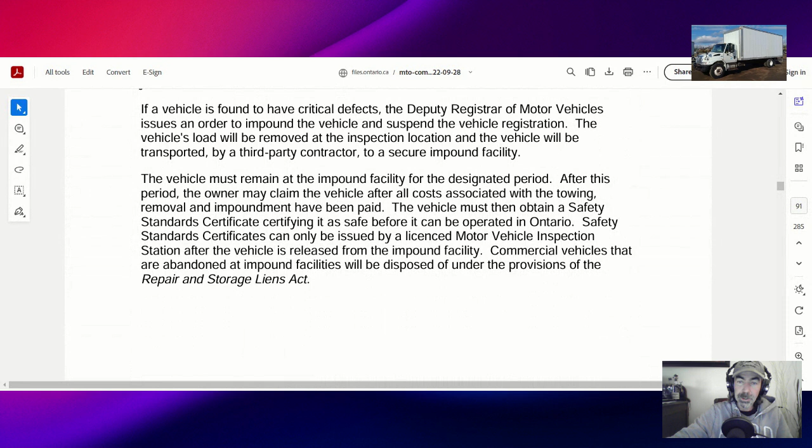The vehicle must remain at the impound facility for the designated period. After this period, the owner may claim the vehicle after all costs associated with the towing, removal, and impoundment have been paid.

The vehicle must then obtain a safety standards certificate certifying it as safe before it can be operated in Ontario. Safety standards certificates can only be issued by a licensed motor vehicle inspection station after the vehicle is released from the impound facility.

Commercial vehicles that are abandoned at impound facilities will be disposed of under the provisions of the Repair and Storage Liens Act.

Vehicles that can be impounded: any commercial motor vehicle operated by a Commercial Vehicle Operators Registration (CVOR) or National Safety Code (NSC) holder, or one that would require CVOR or NSC registration and has a gross weight or registered gross weight exceeding 4,500 kilograms, may be subject to impound if operated with critical defects. This includes buses, trucks, and trailers drawn by these vehicles, as well as all tow trucks regardless of weight. Exemptions: ambulances, fire vehicles, hearses, casket wagons, and motorhomes are not affected by this legislation.

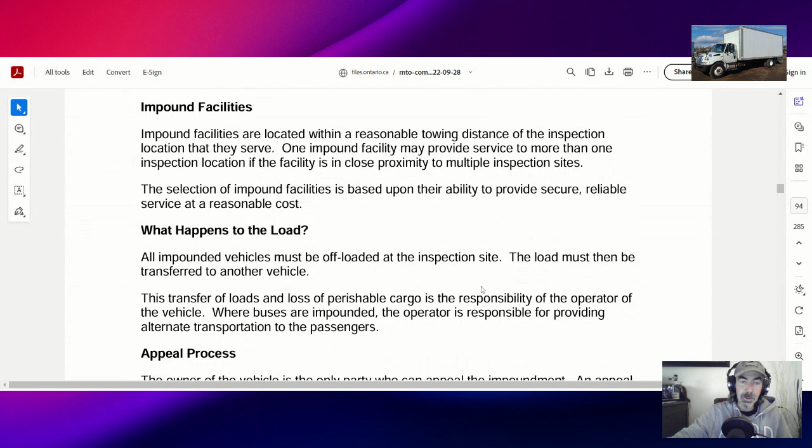Impound facilities are located within a reasonable towing distance of the inspection location they serve. One impound facility may provide service to more than one inspection location if it is in close proximity to multiple inspection sites. The selection of impound facilities is based upon their ability to provide secure, reliable service at a reasonable cost.

What happens to the load? All impounded vehicles must be offloaded at the inspection site, and the load must then be transferred to another vehicle. This transfer of loads and loss of perishable cargo is the responsibility of the operator of the vehicle.

Where buses are impounded, the operator is responsible for providing alternate transportation to the passengers.

Appeal process: the owner of the vehicle is the only party who can appeal the impoundment. An appeal may be made to the License Appeal Tribunal on one of two grounds: one, if the vehicle was stolen; two, if the critical defect was not present at the time of daily inspection.

During the appeal, the owner may apply to the Superior Court of Justice to have the vehicle released from the impound facility after all fees and towing charges have been paid and security has been posted. The Superior Court of Justice will set security of between $5,000 and $10,000.

If the appeal process is successful, the owner will be reimbursed by the Crown for the cost of towing and impound fees. If the order to impound and suspend is not overturned, the owner must return the vehicle to the impound facility for the remainder of the period or forfeit the posted security.

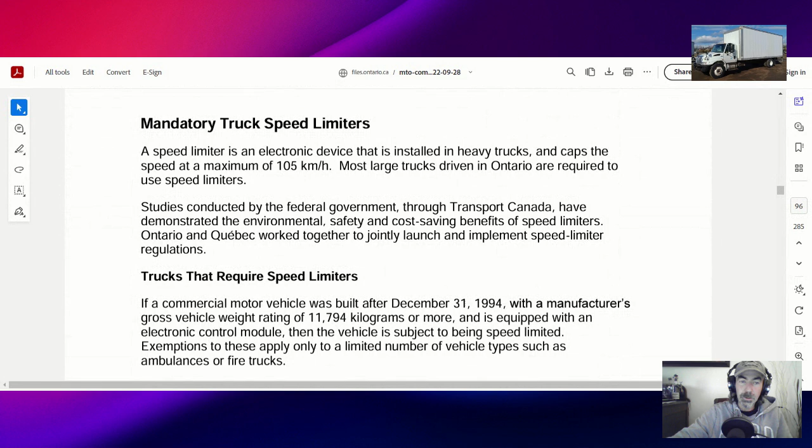Mandatory truck speed limiters. A speed limiter is an electronic device that is installed in heavy trucks and caps the speed at a maximum of 105 kilometers per hour. Most large trucks driven in Ontario are required to use speed limiters.

Studies conducted by the federal government through Transport Canada have demonstrated the environmental, safety, and cost saving benefits of speed limiters. Ontario and Quebec worked together to jointly launch and implement speed limiter regulations.

Trucks that require speed limiters: if a commercial motor vehicle was built after December 31st, 1994, with a manufacturer's gross vehicle weight rating of 11,794 kilograms or more and is equipped with an electronic control module, then the vehicle is subject to being speed limited. Exemptions to these apply only to a limited number of vehicle types, such as ambulances or fire trucks.

Legislation. Ontario passed legislation and supporting regulations to mandate the use of speed limiters on commercial vehicles in 2008. Links to the legislation and regulations can be found below.

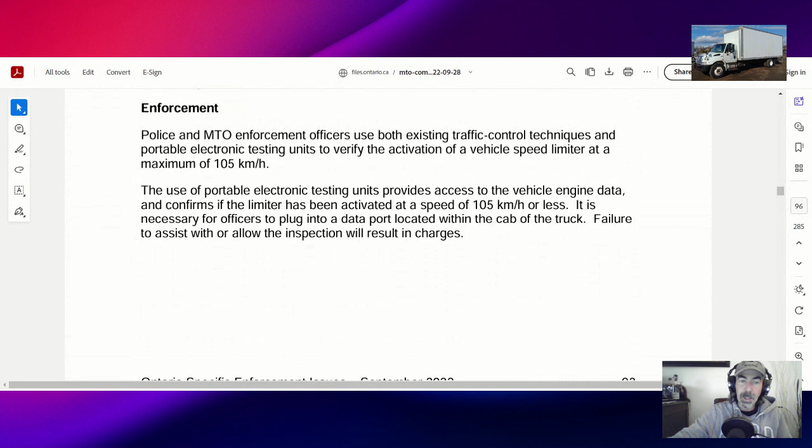Enforcement. Police and MTO enforcement officers use both existing traffic control techniques and portable electronic testing units to verify the activation of a speed limiter at a maximum of 105 kilometers per hour. The use of portable electronic testing units provides access to the vehicle engine data and confirms if the limiter has been activated at a speed of 105 kilometers per hour or less.

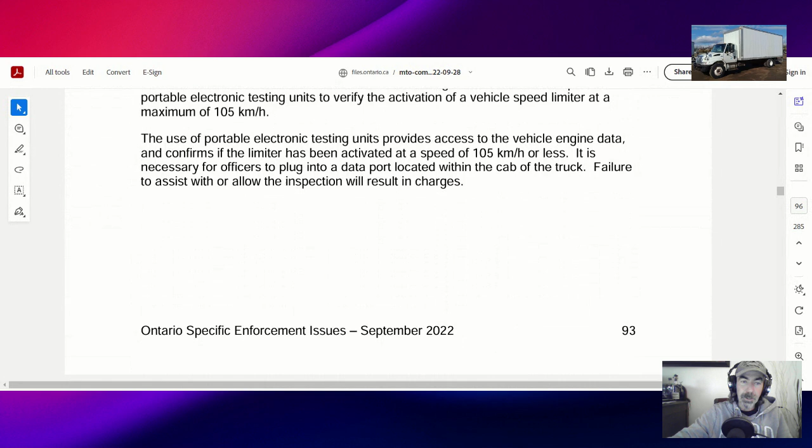It is necessary for officers to plug into a data port located within the cab of the truck. Failure to assist with or allow the inspection will result in charges.

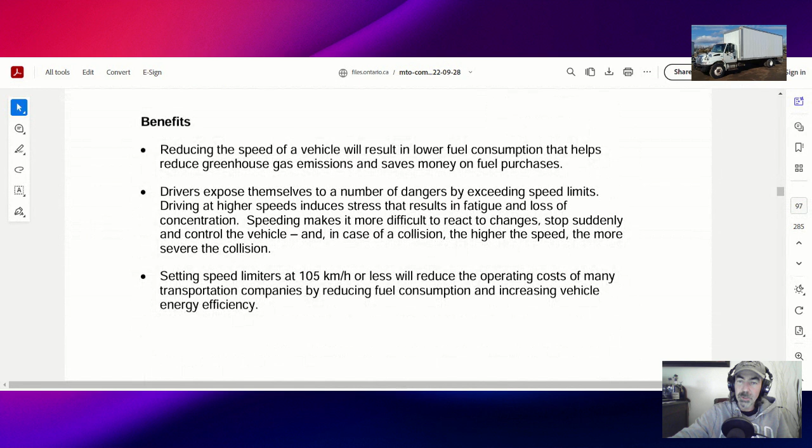Benefits. Reducing the speed of a vehicle will result in lower fuel consumption that helps reduce greenhouse gas emissions and saves money on fuel purchases.

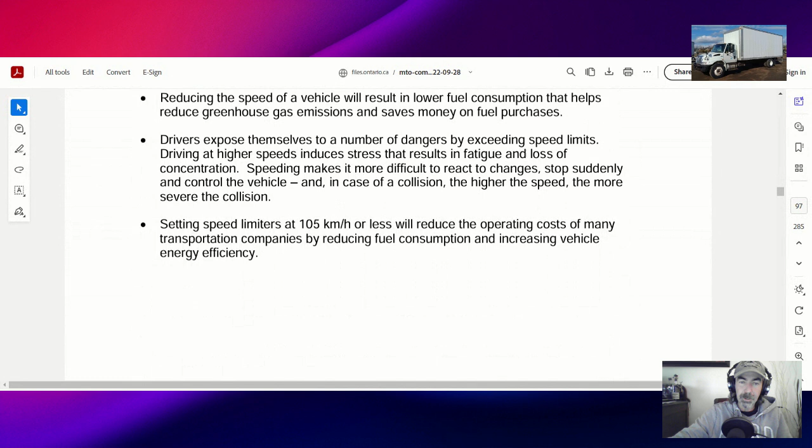Drivers expose themselves to a number of dangers by exceeding speed limits. Driving at higher speeds induces stress that results in fatigue and loss of concentration. Speeding makes it more difficult to react to changes, stop suddenly, and control the vehicle. And in case of a collision, the higher the speed, the more severe the collision.

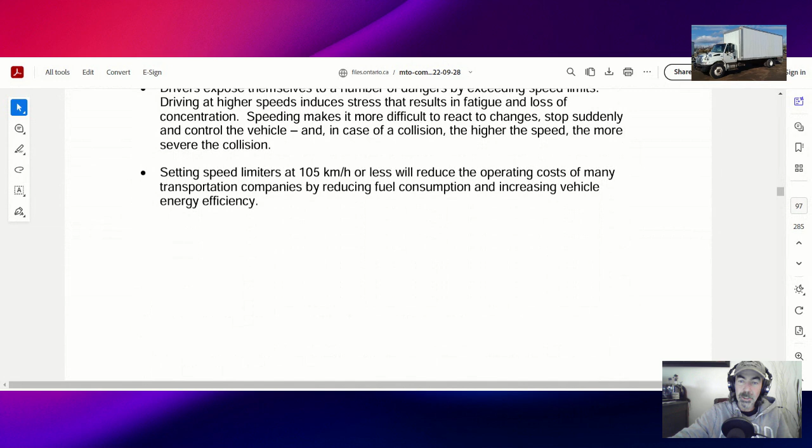Setting speed limiters at 105 kilometers per hour or less will reduce the operating costs of many transportation companies by reducing fuel consumption and increasing vehicle energy efficiency.

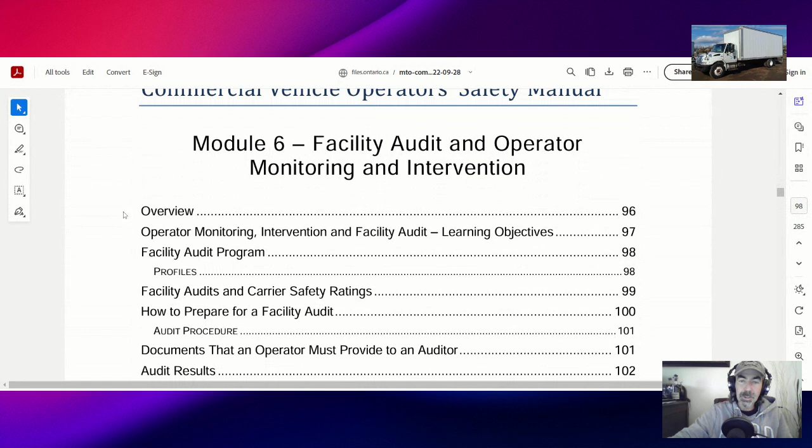Commercial Vehicle Operators Safety Manual, Module 6, Facility Audit and Operator Monitoring and Intervention. Overview.

Operator monitoring, intervention, and facility audit learning objectives; facility audit program profiles; facility audits and carrier safety ratings; how to prepare for a facility audit procedure; documents that an operator must provide to an auditor; audit results; conducting a self audit, a step by step process; vehicle maintenance profile; qualification, records and reporting, QR&R profile; hours of service profile; facility audit sample size guideline; intervention and consequences of non-compliance; monitoring, CVOR monitoring, progressive intervention appeals; Appendix A, sample calculation qualifications, records and reporting, and hours of service profiles.

Overview. The Commercial Safety and Compliance Branch of the Ministry of Transportation of Ontario has prepared this guide to assist and ensure that truck and bus companies, commercial vehicle operators, operate safely and are compliant with the regulations that govern highway use.

Ontario, other provinces, the Government of Canada, and the transportation industry developed the rules and regulations to help reduce the number and severity of collisions. Each jurisdiction has used the National Safety Code standards as guides in drafting their own transportation safety legislation. This approach promotes uniformity across Canada and helps to ensure that the transportation industry remains as viable and sustainable as possible.

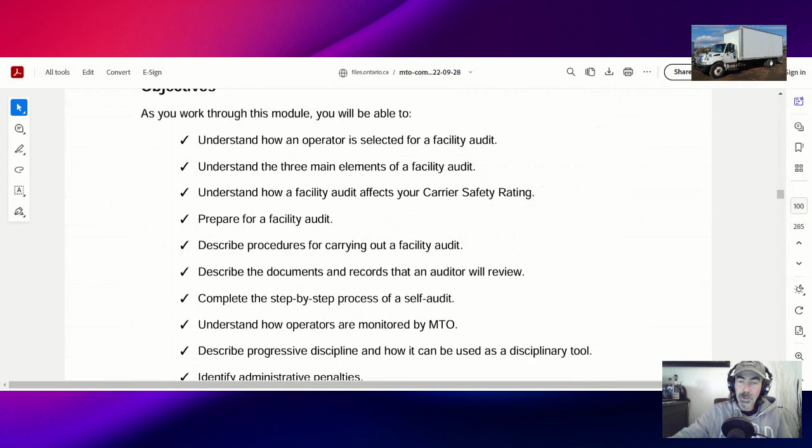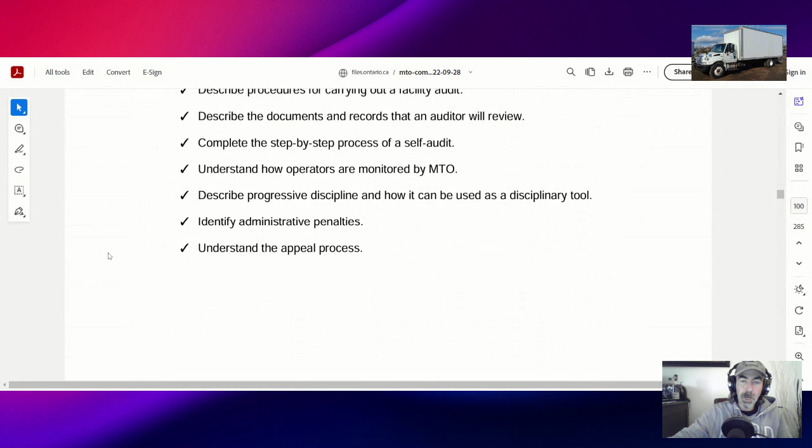Learning objectives: as you work through this module, you will be able to understand how an operator is selected for a facility audit, understand the three main elements of a facility audit, understand how a facility audit affects your carrier safety rating, prepare for a facility audit, describe procedures for carrying out a facility audit, describe the documents and records that an auditor will review, complete the step-by-step process of a self-audit, understand how operators are monitored by MTO, describe progressive discipline and how it can be used as a disciplinary tool, identify administrative penalties, and understand the appeal process.

Facility audit program. An operator can be subject to a facility audit at any time, and the Ministry of Transportation has the authority to audit an operator under the Highway Traffic Act.

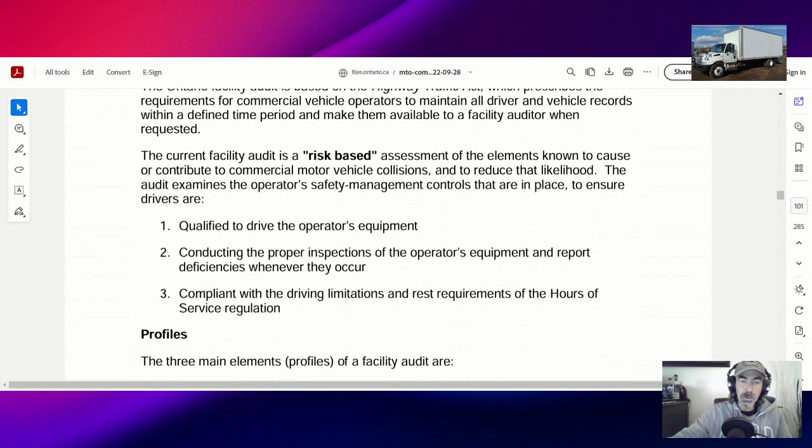The Ontario facility audit is based on the Highway Traffic Act, which prescribes the requirements for commercial vehicle operators to maintain all driver and vehicle records within a defined time period and make them available to a facility auditor when requested. The current facility audit is a risk-based assessment of the elements known to cause or contribute to commercial motor vehicle collisions, and to reduce that likelihood.

The audit examines the operator's safety management controls that are in place to ensure drivers are: one, qualified to drive the operator's equipment; two, conducting the proper inspections of the operator's equipment and reporting deficiencies whenever they occur; three, compliant with the driving limitations and rest requirements of the hours of service regulations.

There are three main elements, or profiles, of a facility audit. One, vehicle maintenance: records current for a period of 24 months, or 6 months after the vehicle ceases to be operated. Two, hours of service: records current for a period of 6 months. Three, driver qualification records and reporting: records current for a period of 2 years, or from the date the driver started with the operator if less, or 6 months after the driver ceases to be employed.

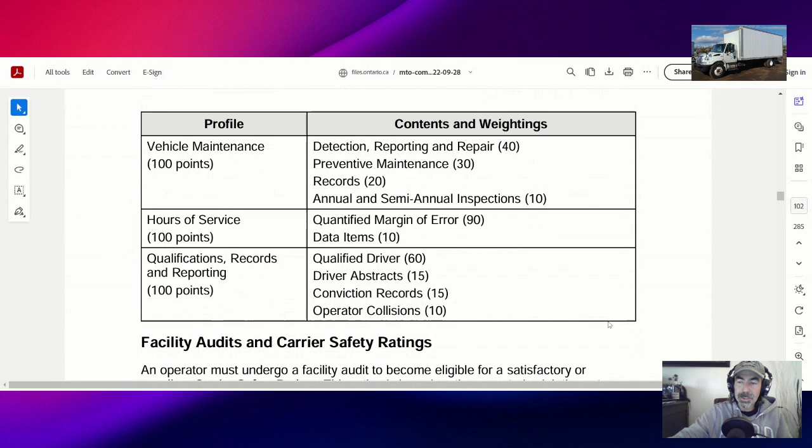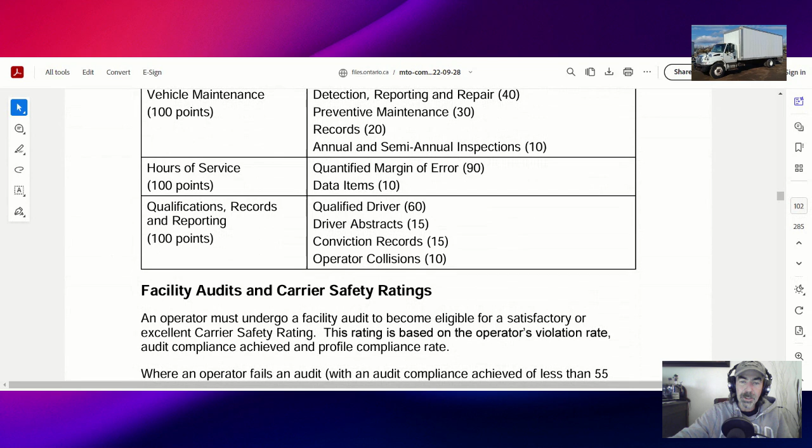Profile scoring: vehicle maintenance, 100 points; hours of service, 100 points; qualification records and reporting, 100 points. Contents and weighting: detection, reporting, and repair, 40; preventative maintenance, 30; records, 20; annual and semi-annual inspections, 10. Quantified margin of error, 90; data items, 10. Qualified driver, 60; driver abstracts, 15; conviction records, 15; operator collisions, 10.

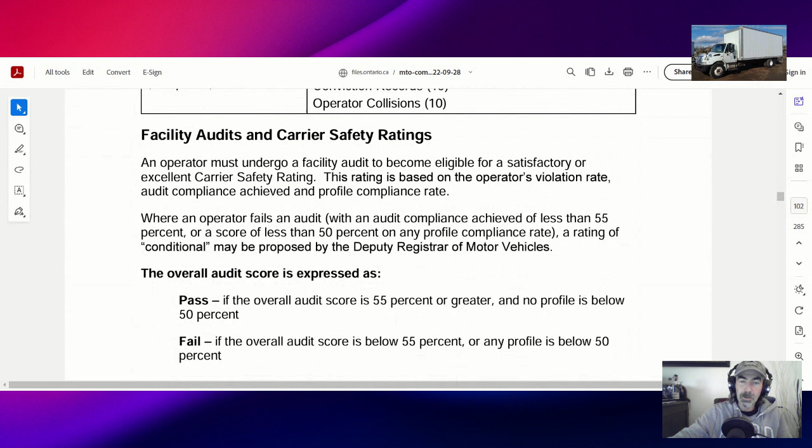Facility audits and carrier safety ratings. An operator must undergo a facility audit to become eligible for a satisfactory or excellent carrier safety rating. This rating is based on the operator's violation rate, audit compliance achieved, and profile compliance rate. Where an operator fails an audit with an audit compliance achieved of less than 55%, or a score of less than 50% on any profile compliance rate, a rating of conditional may be proposed by the Deputy Registrar of Motor Vehicles. The overall audit score is expressed as pass if the overall audit score is 55% or greater and no profile is below 50%; fail if the overall audit score is below 55% or any profile is below 50%.

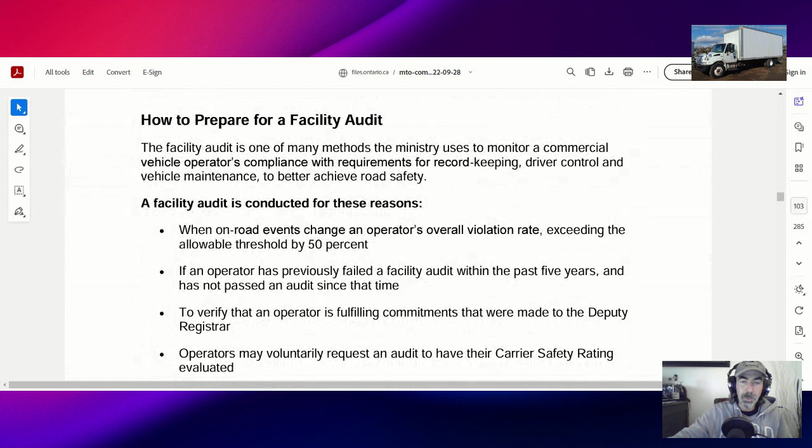How to prepare for a facility audit. The facility audit is one of many methods the ministry uses to monitor a commercial vehicle operator's compliance with the requirements for record keeping, driver control, and vehicle maintenance to better achieve road safety.

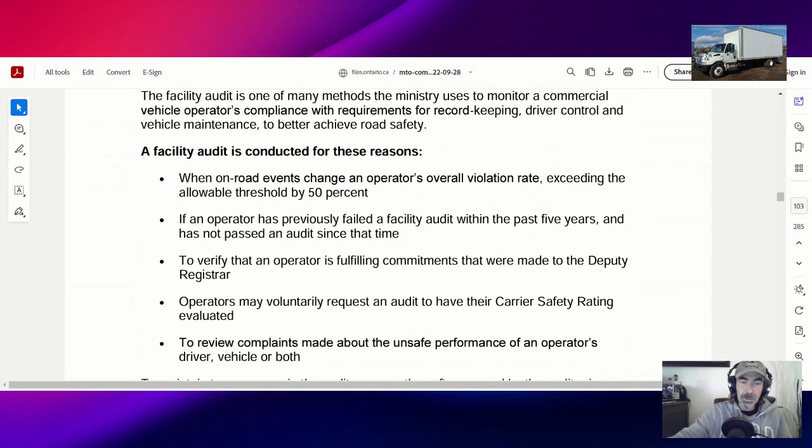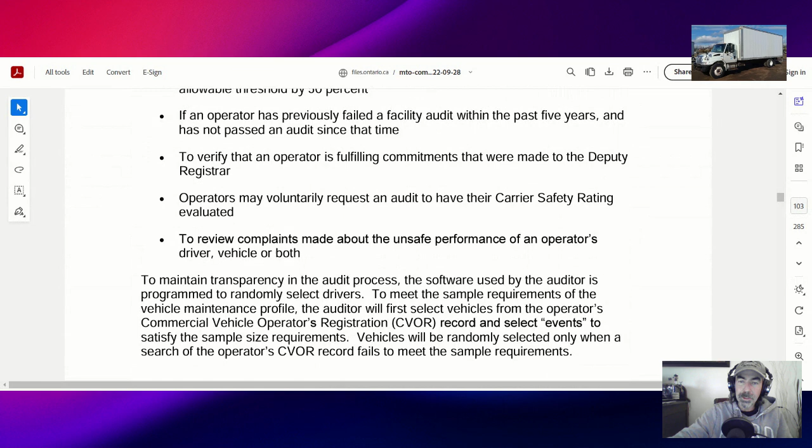A facility audit is conducted for these reasons: when on-road events change an operator's overall violation rate, exceeding the allowable threshold by 50%; if an operator has previously failed a facility audit within the past 5 years and has not passed an audit since that time; to verify that an operator is fulfilling commitments made to the deputy registrar; operators may voluntarily request an audit to have their carrier safety rating evaluated; or to review complaints made about the unsafe performance of an operator's driver, vehicle, or both.

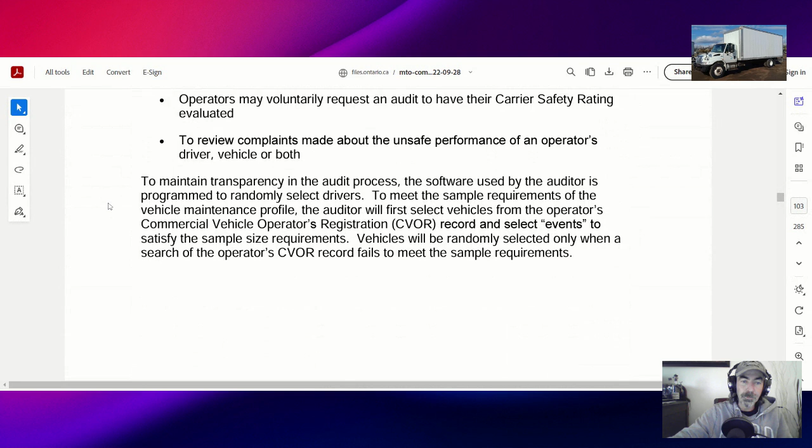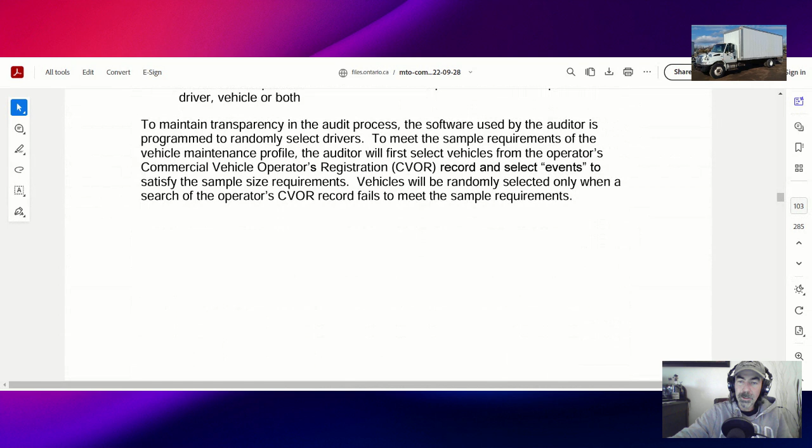To maintain transparency in the audit process, the software used by the auditor is programmed to randomly select drivers. To meet the sample requirements of the vehicle maintenance profile, the auditor will first select vehicles from the operator's Commercial Vehicle Operators Registration (CVOR) record and select events to satisfy the sample size requirements. Vehicles will be randomly selected only when a search of the operator's CVOR record fails to meet the sample requirements.

Audit procedure. A facility auditor may contact the operator to schedule an audit by phone or in writing. The purpose of the facility audit, as well as the documents that will be required, is clearly explained to the operator at that time. The auditor may also want to verify some details about the operator's business during the call.

At the entrance interview, the auditor explains the purpose, procedure, scoring, and importance of the audit and its potential impact on the operator's carrier safety rating and carrier profile.

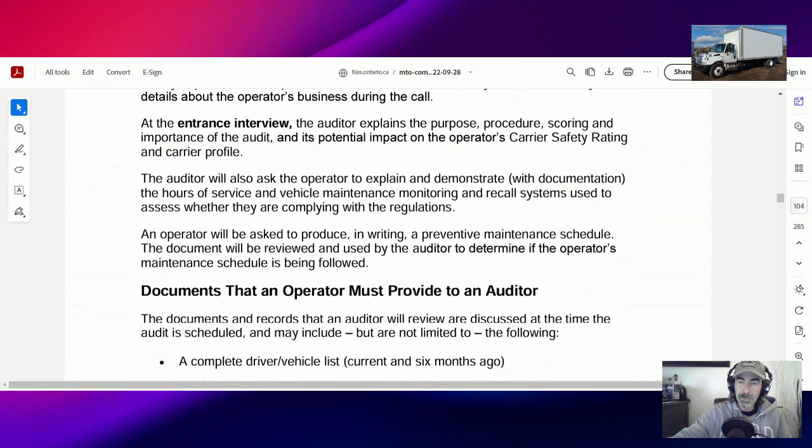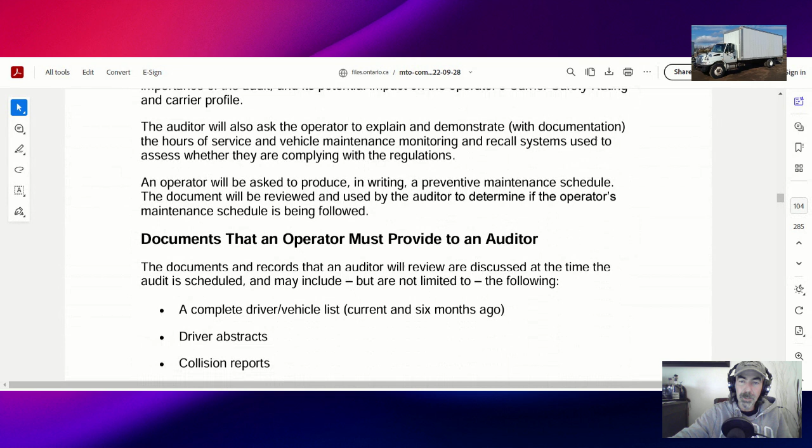The auditor will also ask the operator to explain and demonstrate with documentation the hours of service and vehicle maintenance monitoring and recall systems used to assess whether they are complying with the regulations.

An operator will be asked to produce in writing a preventative maintenance schedule. The document will be reviewed and used by the auditor to determine if the operator's maintenance schedule is being followed.

Documents that an operator must provide to an auditor. The documents and records that an auditor will review are discussed at the time the audit is scheduled and may include, but are not limited to, the following: a complete driver/vehicle list, current and 6 months ago, driver abstracts, collision reports, independent time markers from operator or MTO records, for example toll receipts, roadside inspection reports, conviction records, and so on.

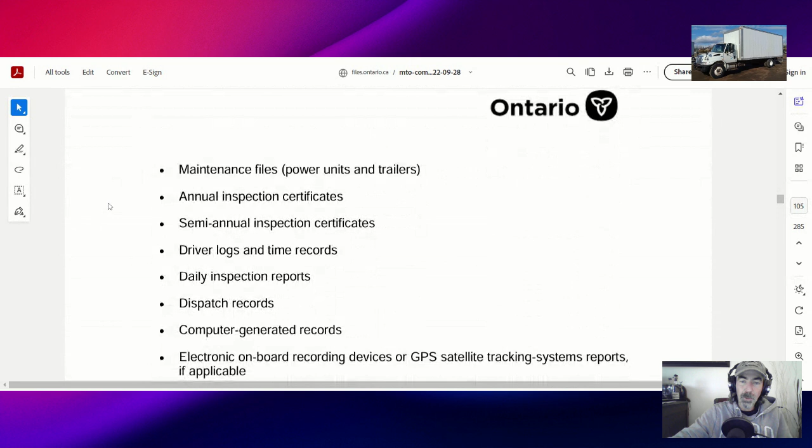Payroll records, invoices, cell phone, fuel, bridge authority, commercial accounts, and so on, bills of lading, operators' invoice records, bridge tolls, accommodation/fuel receipts, operators' maintenance statements, maintenance files, power units and trailers, annual inspection certificates, semi-annual inspection certificates, driver logs and time records, daily inspection reports, dispatch records, computer-generated records, electronic onboard recording devices or GPS satellite tracking system reports, if applicable, proof of insurance, or any supporting document that could be used to assess compliance.

The audit will be completed in a timely manner, but its length will vary depending on a number of factors, such as the size of the operation, the availability of records, and the availability of the auditor and the operator's support personnel.

Audit results. After the audit is completed, an exit interview takes place. The operator receives a summary of the audit with scores for each driver, vehicle, and, if applicable, collision files that were examined. The operator will be given ample opportunity to review and discuss with the auditor the results of the audit and any possible charges.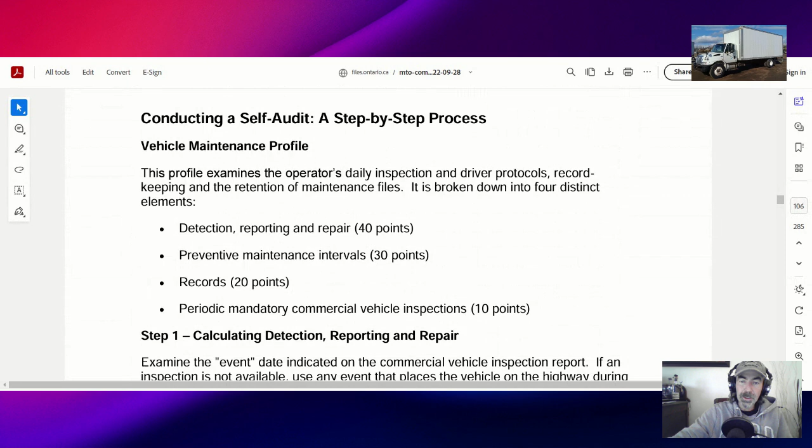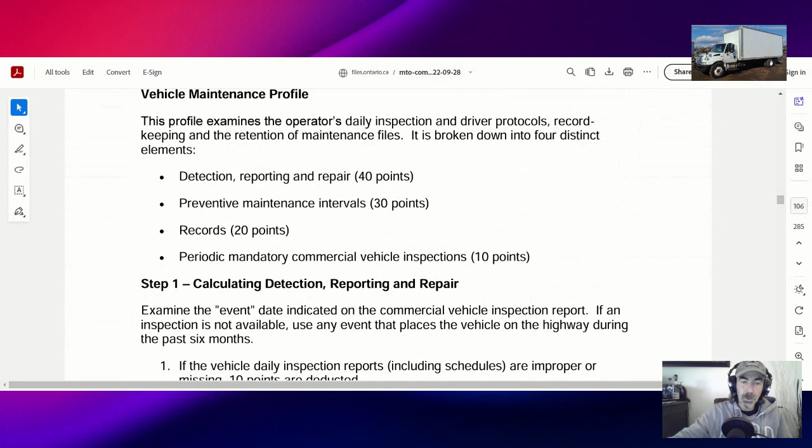Conducting a self-audit, a step-by-step process. Vehicle maintenance profile. This profile examines the operator's daily inspection and driver protocols, record keeping, and the retention of maintenance files. It is broken down into 4 distinct elements: detection, reporting, and repair, 40 points; preventative maintenance intervals, 30 points; records, 20 points; periodic mandatory commercial vehicle inspections, 10 points.

Step 1. Calculating detection, reporting, and repair. Examine the event date indicated on the commercial vehicle inspection report. If an inspection is not available, use any event that places the vehicle on the highway during the past 6 months.

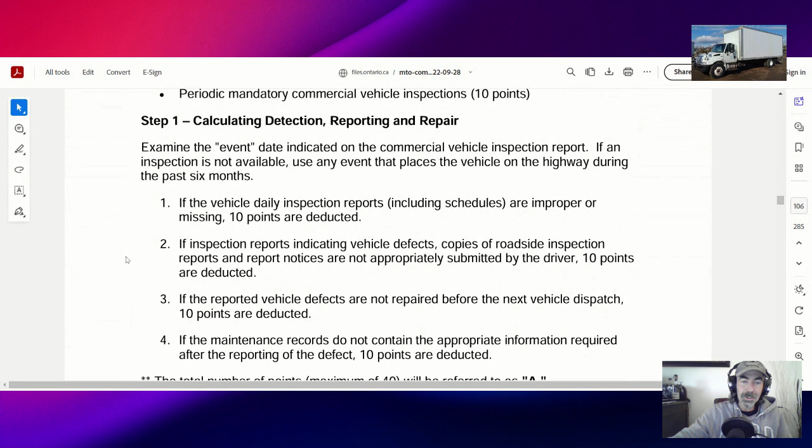1. If the vehicle daily inspection reports, including schedules, are improper or missing, 10 points are deducted. 2. If inspection reports indicating vehicle defects, copies of roadside inspection reports, and report notices are not appropriately submitted by the driver, 10 points are deducted.

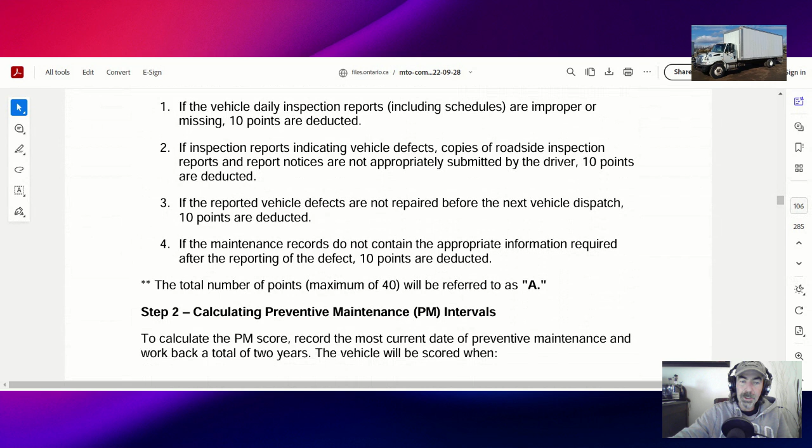3. If the reported vehicle defects are not repaired before the next vehicle dispatch, 10 points are deducted. If the maintenance records do not contain the appropriate information required after the reporting of the defect, 10 points are deducted. The total number of points, maximum 40, will be referred to as A.

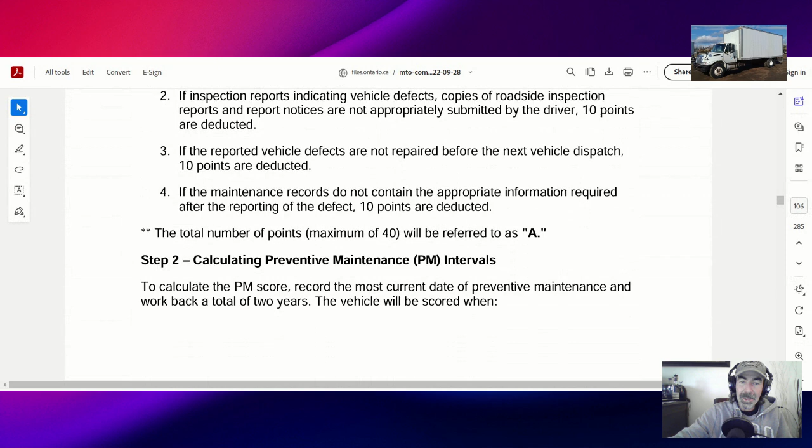Step 2. Calculating the preventative maintenance, PM intervals. To calculate the PM score, record the most current date of preventative maintenance and work back a total of 2 years. The vehicle will be scored when...

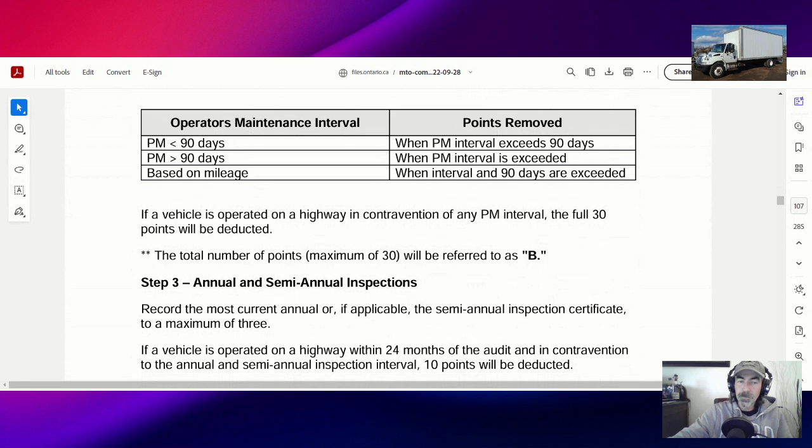Operator's maintenance interval, points removed: PM less than 90 days when PM interval exceeds 90 days; PM more than 90 days when PM interval is exceeded; based on mileage, when interval and 90 days are exceeded. If a vehicle is operated on a highway in contravention of any PM interval, the full 30 points will be deducted. The total number of points, maximum 30, will be referred to as B.

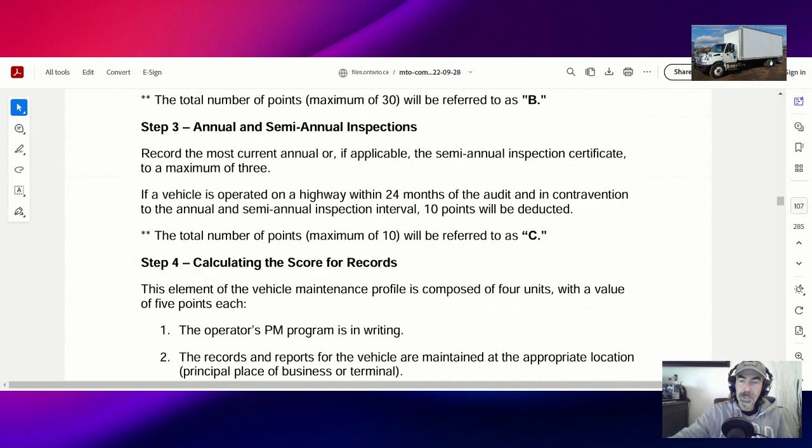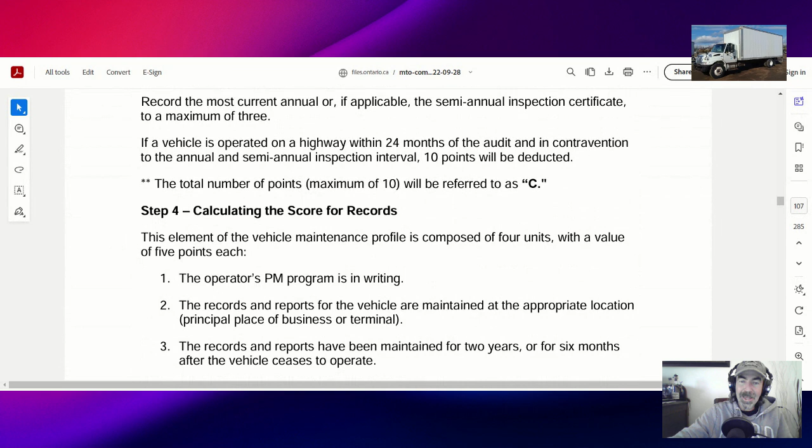Step 3. Annual and semi-annual inspections. Record the most current annual, or if applicable, the semi-annual inspection certificate to a maximum of 3. If a vehicle is operated on a highway within 24 months of the audit and in contravention to the annual and semi-annual inspection interval, 10 points will be deducted. The total number of points, maximum of 10, will be referred to as C.

Step 4. Calculating the score for records. This element of the vehicle maintenance profile is composed of 4 units with a value of 5 points each.

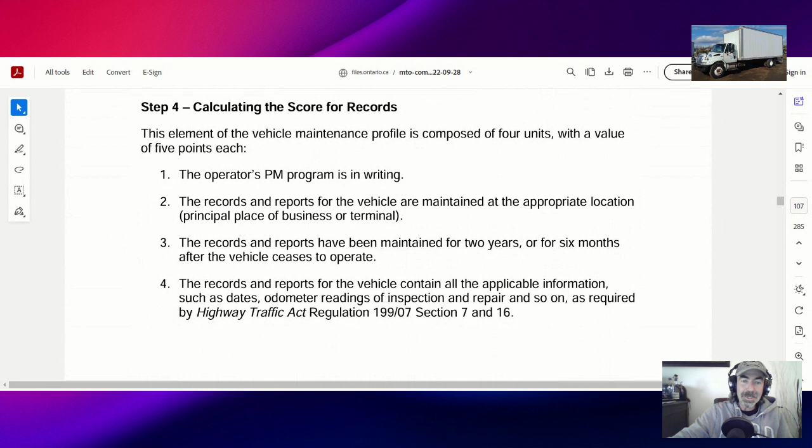The operator's PM program is in writing. The records and reports for the vehicle are maintained at the appropriate location, principal place of business, or terminal. The records and reports have been maintained for 2 years or for 6 months after the vehicle ceases to operate. The records and reports for the vehicle contain all applicable information such as dates, odometer readings of inspection and repair, and so on, as required by Highway Traffic Act Regulation 199/07, Section 7 and 16.

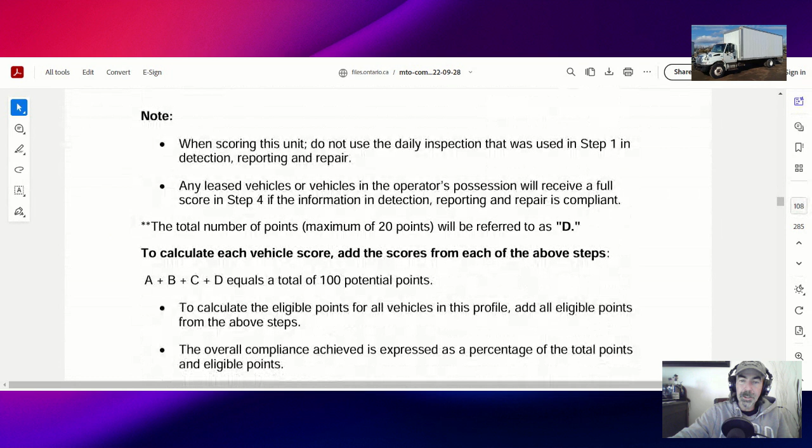Note, when scoring this unit, do not use the daily inspection that was used in Step 1 in detection, reporting, and repair. Any leased vehicles or vehicles in the operator's possession will receive a full score in Step 4 if the information in detection, reporting, and repair is compliant. The total number of points, maximum of 20 points, will be referred to as D.

To calculate each vehicle score, add the scores from each of the above steps. A plus B plus C plus D equals a total of 100 potential points. To calculate the eligible points for all vehicles in this profile, add all eligible points from the above steps. The overall compliance achieved is expressed as a percentage of total points and eligible points. The compliance rate is expressed as points based on the percentage of compliance achieved.

Sample calculation of vehicle maintenance profile.

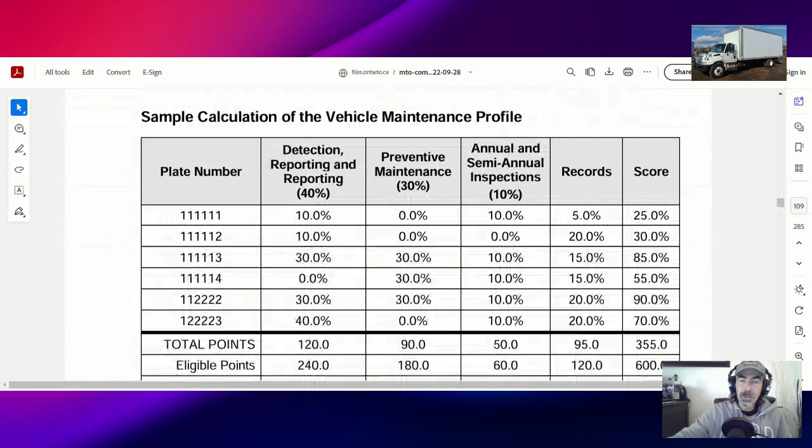Qualification, records, and reporting, QR&R profile. This profile consists of several elements that are tailored to fit the specific operational scope of the operator. Driver qualifications, conviction reporting, and record retention are examined, and, if applicable, the reporting and resolution of collisions. Retention periods vary for each element and are explained below. Operators may be exempt from certain record-keeping requirements, such as being a driver owner. Points are blended to represent only those elements applicable to the operator.

The profile elements and their represented weighting are as follows: qualified drivers, 60%; driver abstracts, 15%; conviction records, 15%; operator collisions, 10%. The driver/owners would not be expected to acquire and retain abstracts and records on themselves. In those cases, the 60% rating for qualified drivers is then expressed as 100%. Operators with no collisions on their records will automatically receive the 10% for operator collisions.

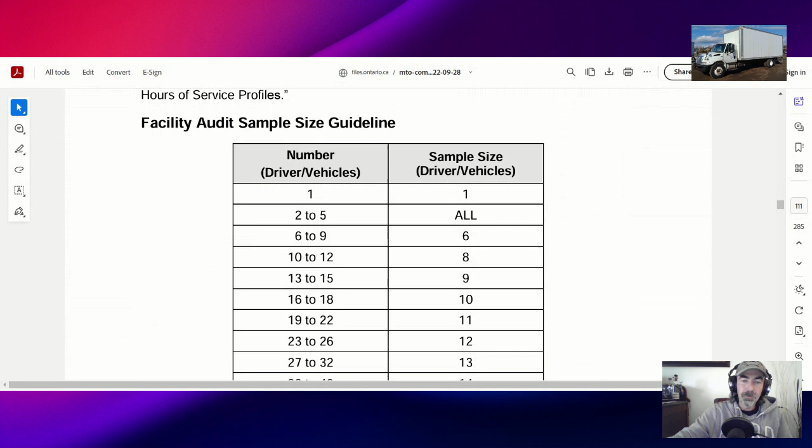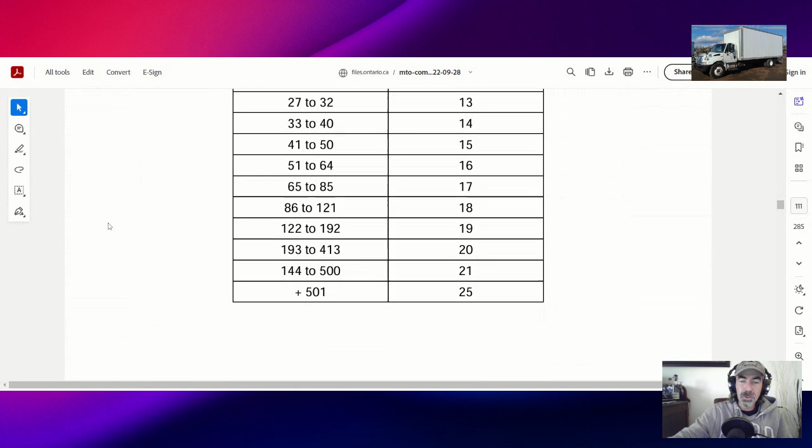Facility audit sample size: number of drivers or vehicles, 1, sample size 1. 2 to 5, all. 6 to 9, 6. 10 to 12, 8. So basically, the larger the fleet, the more vehicles and drivers to be audited.

For more information on vehicle maintenance and hours of service requirements, refer to the Highway Traffic Act, Vehicle Maintenance O Regulation 199/07, Commercial Motor Vehicle Inspections, Hours of Service Requirements O Regulation 555/06, Hours of Service. For more information, contact the Facility Audit Administrator, Carrier Sanctions and Investigations Office, Ministry of Transportation, 301 St. Paul Street, 3rd floor, St. Catharines, Ontario.

Intervention and consequences of noncompliance. As a result of an audit, MTO may take any one or a combination of the following intervention options: no action, as the operator has demonstrated acceptable compliance; request a comprehensive action plan acceptable to MTO, which the operator must develop; impose conditions on the operator's CVOR certificate, requiring the operator to take specific actions by specified dates; or not issue various types of permits or certificates.

Facility audit information is quantified and becomes an integral part of determining an operator's carrier safety rating. Therefore, it is essential that an operator demonstrate a high level of compliance to maintain an acceptable safety rating. Failure to do so may lead to an operator being restricted or prevented from operating commercial vehicles in the province of Ontario.

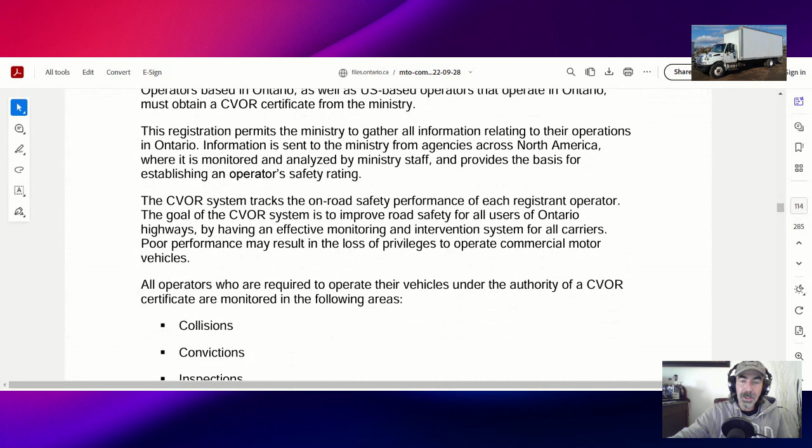CVOR monitoring. Operators based in Ontario, as well as US-based operators that operate in Ontario, must obtain a CVOR certificate from the ministry. This registration permits the ministry to gather all information relating to their operations in Ontario. Information is sent to the ministry from agencies across North America, where it is monitored and analyzed by ministry staff, and provides the basis for establishing an operator's safety rating.

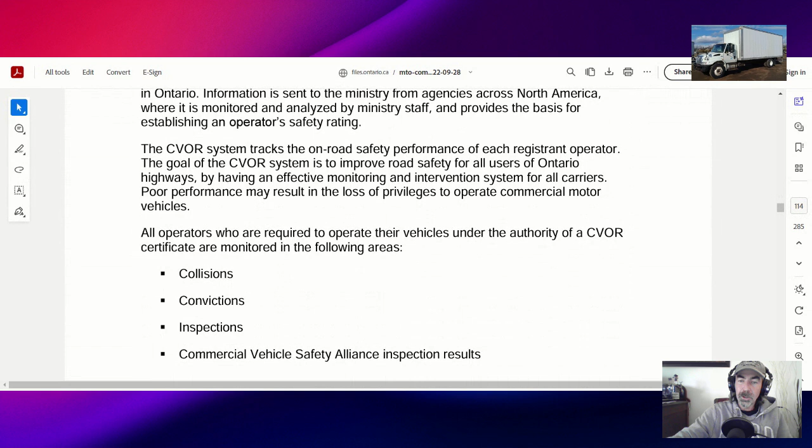The CVOR system tracks the on-road safety performance of each registrant operator. The goal of the CVOR system is to improve road safety for all users of Ontario highways by having an effective monitoring and intervention system for all carriers. Poor performance may result in the loss of privileges to operate commercial motor vehicles.

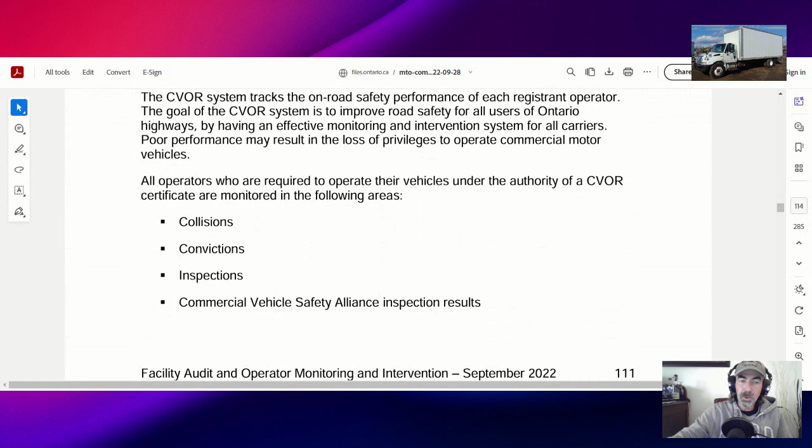All operators who are required to operate their vehicles under the authority of a CVOR certificate are monitored in the following areas: collisions, convictions, inspections, and Commercial Vehicle Safety Alliance inspection results. For more information on CVOR monitoring, violation rates, and carrier safety rating, see Module 4 of this manual.

Progressive intervention. The purpose of ministry sanctions and intervention is to reduce the number and severity of collisions and reduce risk to the public. This program ensures that operators demonstrating noncompliance are approached in a consistent, fair, and objective manner, yet is flexible enough to allow for special circumstances.

When contemplating an intervention action with an operator, the ministry considers predetermined stages established, information in the operator's profile, the operator's monitoring stage, if any, audit information collected through an investigation or inspection, other appropriate information about significant incidents related to safety or compliance to safety laws, disciplinary letters sent regarding unacceptable performance, charges laid resulting from a facility audit, direction to the operator to arrange for a compliance audit, conditional carrier safety rating, suspension or cancellation of the operator's operating privileges, unsatisfactory carrier safety rating, fleet limitation, and seizure of plates.